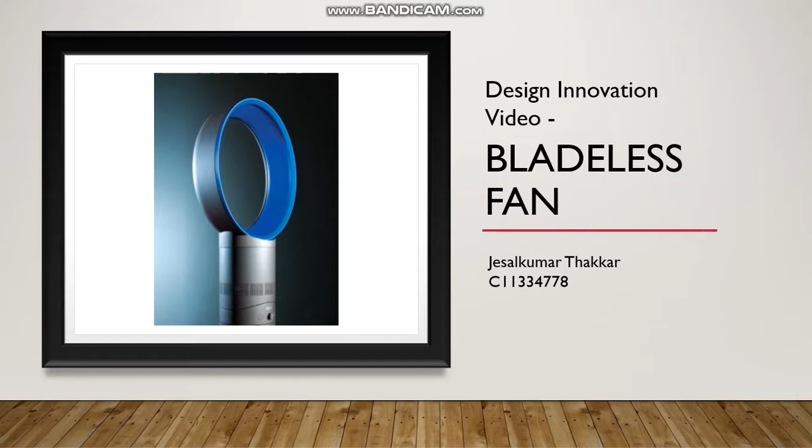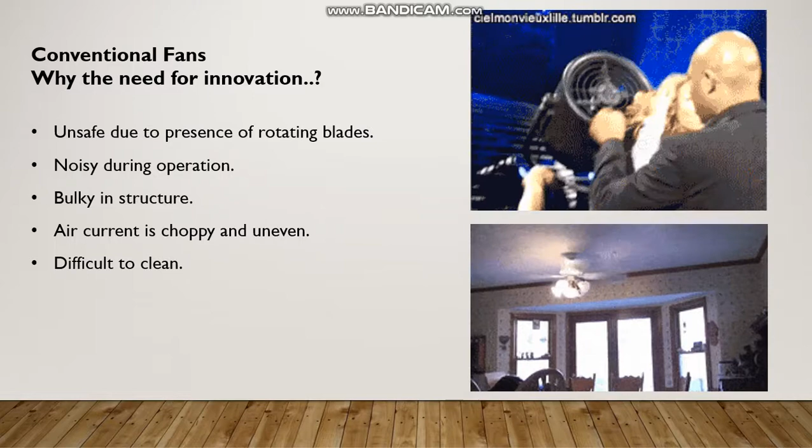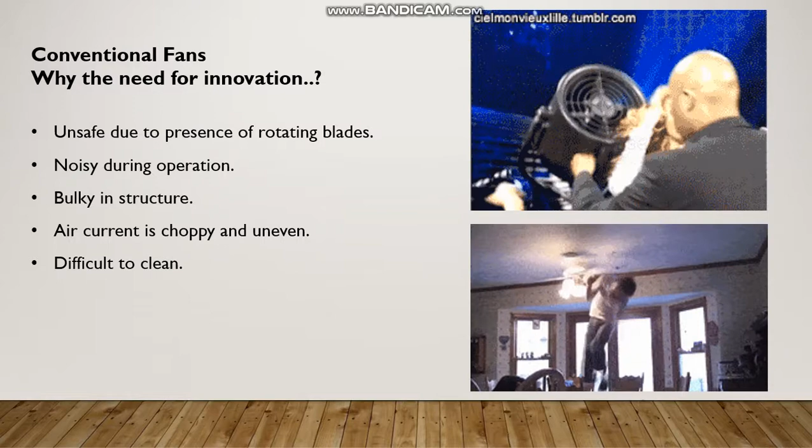So every time we think about a fan, the very first thing which comes to our mind is this bulky rotating machine which is more than likely to be making a lot of noise. So why is there a need for innovation there? Firstly, it's usually very unsafe due to the presence of rotating blades. It's very noisy during operation, it's bulky in structure, which is the reason why it's difficult to clean most of the times. And the air current generated by our conventional fan is usually very choppy and uneven.

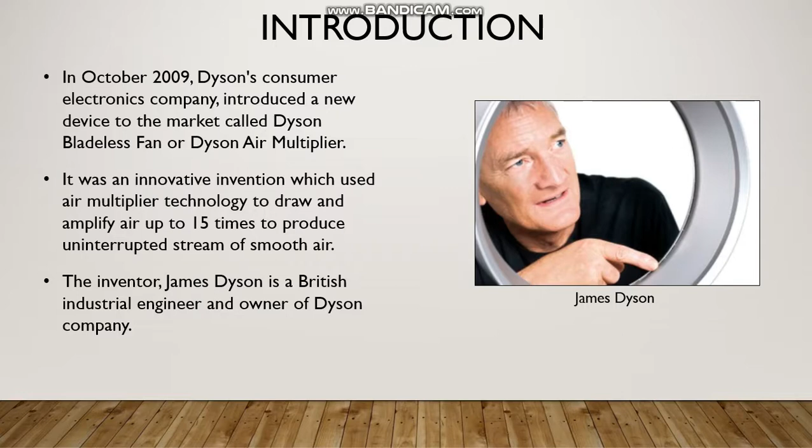So, in October 2009, James Dyson, who is a British industrial engineer and also the owner of Dyson Company, introduced this new product in the market which was called Dyson Air Multiplier. And it was a very innovative invention because it used to amplify air up to 15 times and it used to produce a very uninterrupted stream of very smooth air.

So, looking at the design description, the fan came in two pieces, which were the outer ring and the cylindrical base. But looking at the overall product, it could be divided into four different main components, which were the outer ring, cylindrical base, mixed flow impeller, and the brushless DC motor.

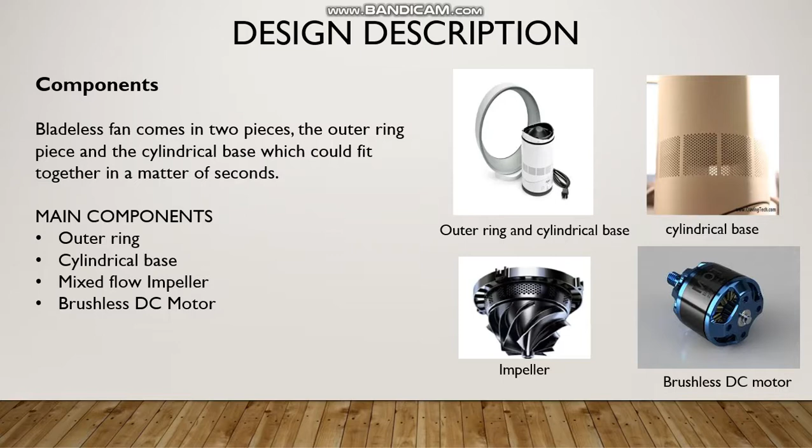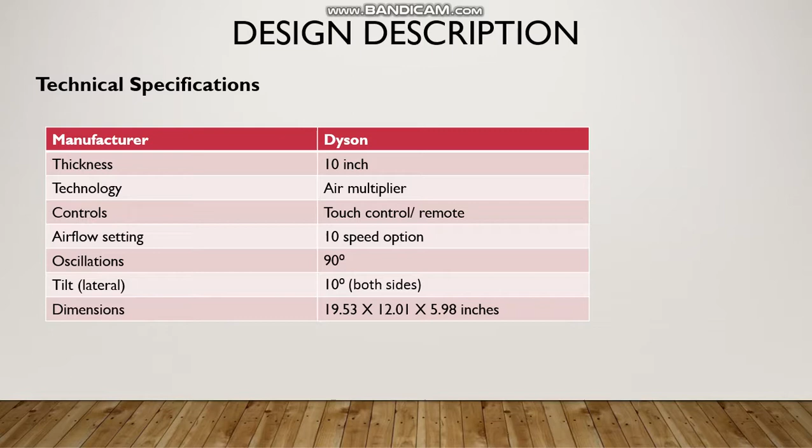Quickly going through the technical specifications of the fan, the thickness of the fan was 10 inches. The technology used here was air multiplication. There was remote control, and touch control was also available for the fan. There was a 10 speed option for the airflow setting. It has 90-degree oscillation movement. It has 10 degrees of lateral tilting, and the overall dimensions for the fan are 19.5 by 12 by 6 inches.

So before we jump on to understanding the working of the fan, let's just go through a video by Dyson UK, which will help us understand it better.

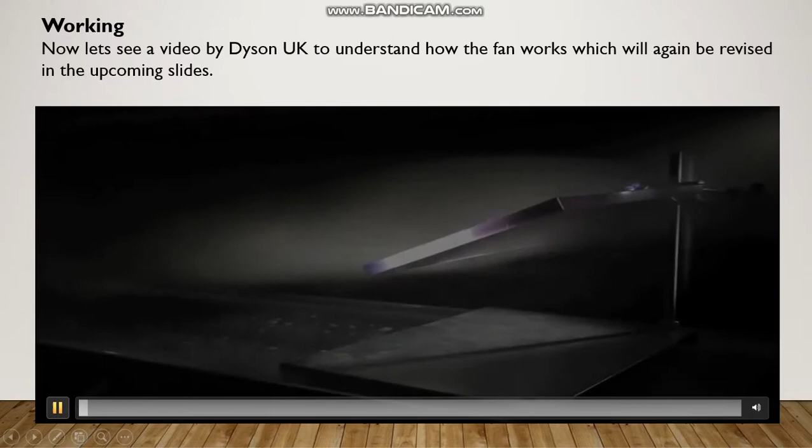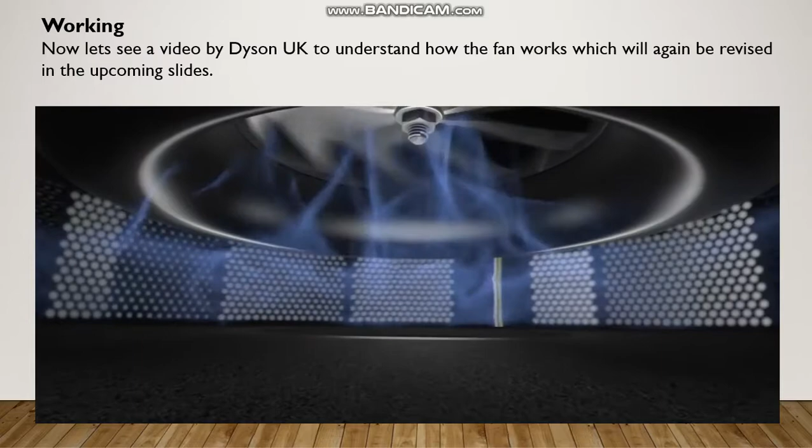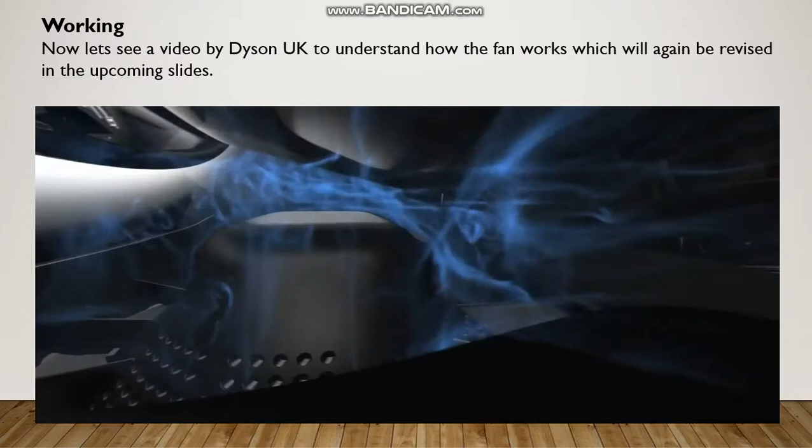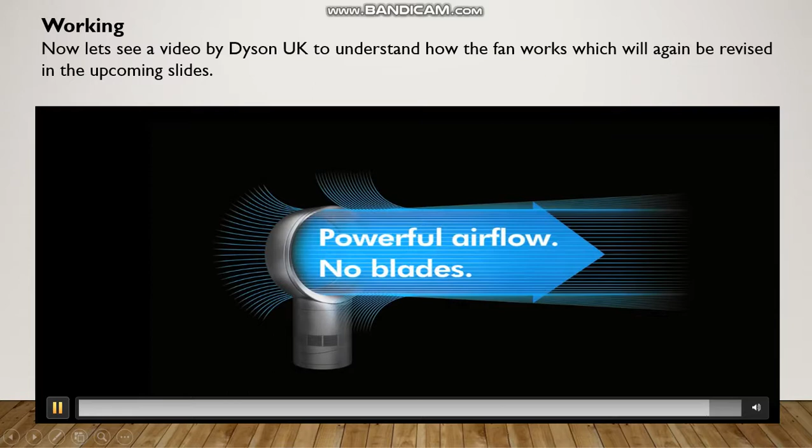When airflow is forced to change direction, the disrupted air is turbulent. Turbulence is noisy and wastes energy. In the latest generation of Dyson fans, turbulence is minimized, ensuring they're quieter and more efficient than their predecessors. This begins with the intake holes, carefully arranged so air is drawn evenly into the machine. Motor noise is captured and dissipated by a Helmholtz cavity, and any vibration is isolated by an acoustically engineered motor casing. The fins of the impeller are asymmetric, so each harmonizes less with the others, and they have a scalloped trailing edge to further improve acoustics. An aerodynamic diffuser separates the airflow into controlled parts for efficiency. Air is then channeled equally into the two sides of the loop. It has a larger volume at the bottom, which allows air to enter with less turbulence, reducing noise. As pressure in the loop builds, air is forced out through the aperture at a high constant velocity. As the airflow exits, it clings to the airfoil-shaped ramp, generating maximum velocity and projection. Surrounding air is then drawn in from around the loop, amplifying the volume of air projected. This is how air multiplier technology projects smooth, powerful, high-velocity airflow. Powerful airflow, no blades.

So the working of the fan can be divided into four simple steps. The first one being the air suction, which is nothing but the air which is getting sucked from the small vents which are provided in the base at a rate of 27 liters per second. The second step is air acceleration, in which the air is forced up into the loop amplifier or the ring structure using the impeller, and it passes over the 16-degree aerofoil, which not just channelizes the direction of the air but also increases the velocity of the air coming out of the fan.

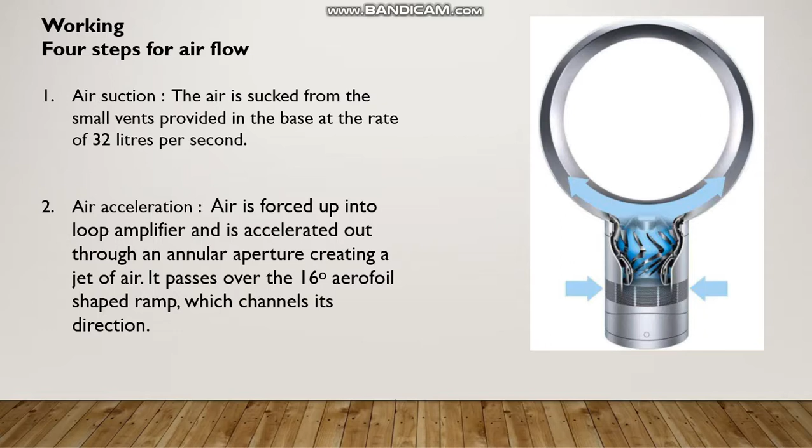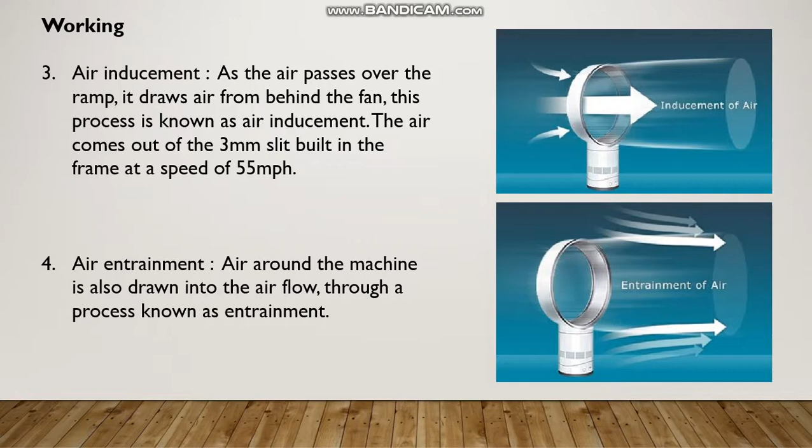So why is this design innovative? Now, clearly, according to me, it is one of the most innovative designs I've come across because it has completely changed the conventional perception of how a fan is supposed to be. It doesn't have any accessible moving parts, which makes it a lot safer.

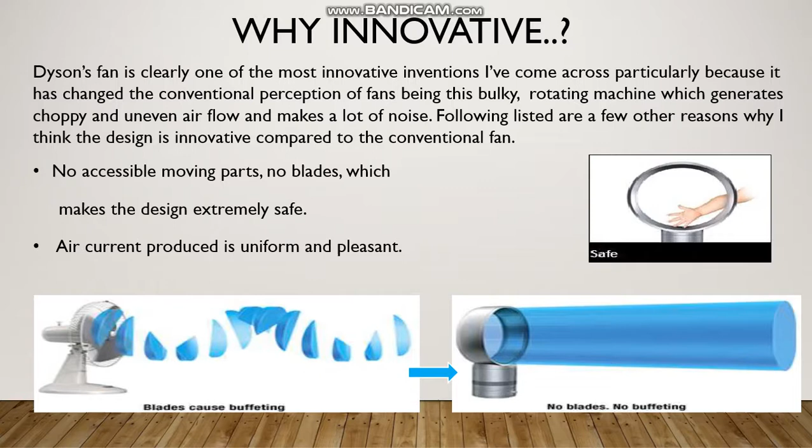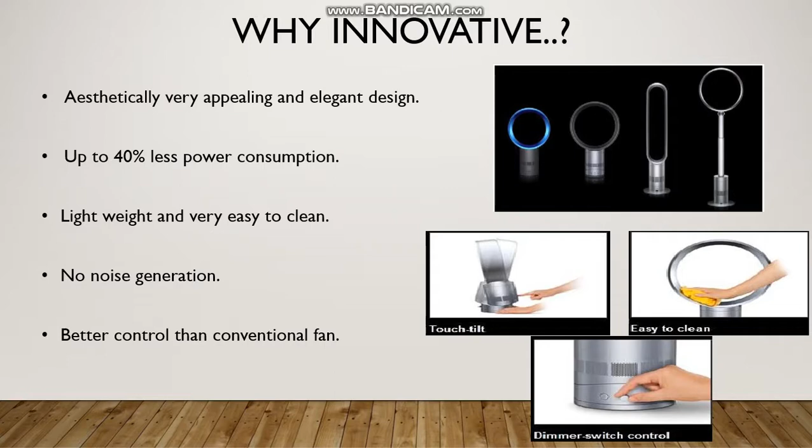The air current which is produced from this type of fan is very uniform and pleasant, which was very choppy in the conventional fans. It is aesthetically very appealing. The power consumption for such a fan is very less. It is lightweight and it's very easy to clean. There is no noise generation, and the controlling of this fan is also a lot better than the conventional fans we have.

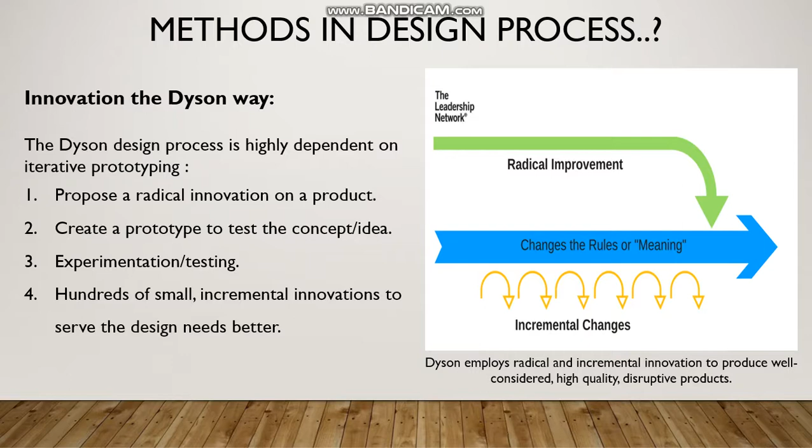So the method in the designing process used for coming up with this bladeless fan was basically the iterative prototyping method, which is used for most of the Dyson products. The steps involved in this designing process are: firstly, proposing a radical innovation or a new idea or concept for an existing product. The second step is creating a prototype to test that idea or concept. The third step is experimentation or testing for that specific prototype. And the last step is creating many prototypes and making incremental innovations to serve the design needs better and better.